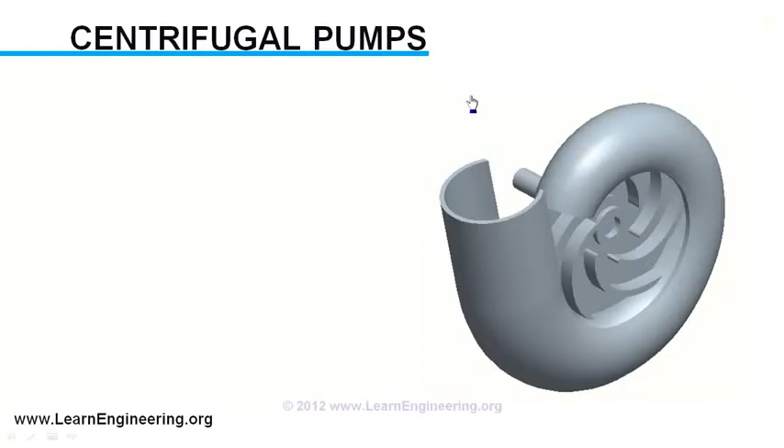Centrifugal pumps are the most commonly used turbo machinery devices, which are used to raise pressure or induce flow in a control volume. They are radial flow devices. Various kinds of centrifugal pumps are available in the market, with different construction details, but the working principle behind all of them remains the same. In this video we will analyze the working principle of a centrifugal pump with single suction, semi-open impeller. One of such pumps is shown in the figure, with one part of its casing removed for ease of understanding.

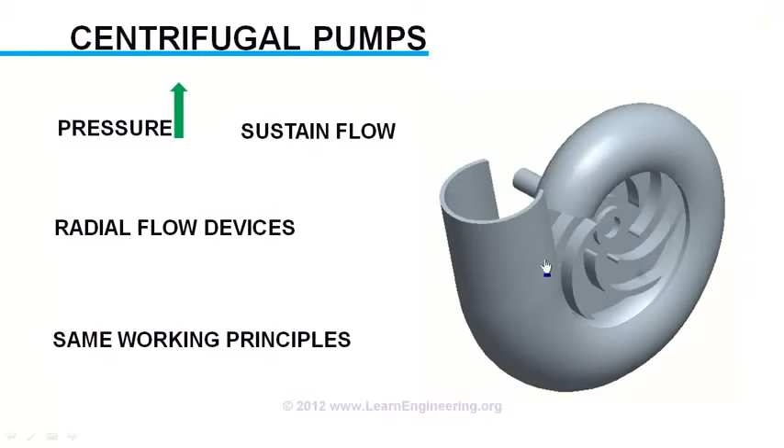Working of a centrifugal pump is simple. As the impeller rotates, it sucks fluid from outside through the eye of the impeller. The fluid is pushed radially along the impeller to the casing. The casing collects the fluid, and it is pumped out through the discharge nozzle. We will go through the main components of a centrifugal pump in a detailed way.

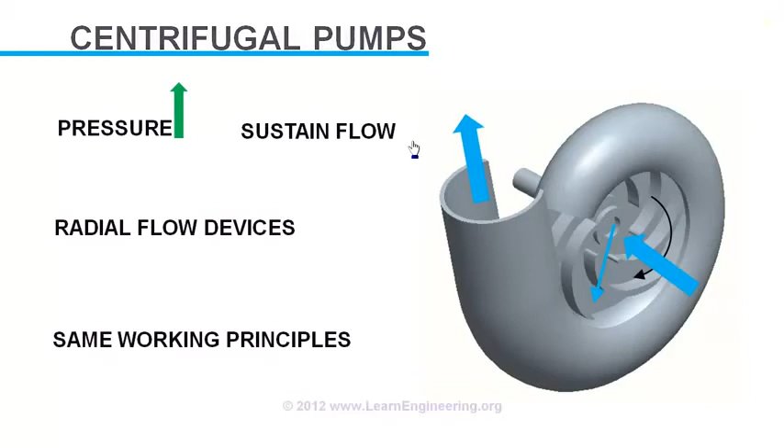First, the impeller. The impeller is the device which rotates and transfers energy to the fluid. It has a collection of vanes fitted to a hub plate.

The next component is the casing, which collects fluid from the impeller in an efficient way. The casing has a special shape, with area of cross-section increasing from inlet to outlet. As the impeller ejects fluid throughout the casing, along the length of the casing the mass flow rate increases. But increasing area of the casing helps in maintaining almost the same velocity. Thus the volute-shaped casing helps in converting the dynamic part of fluid energy to the static part.

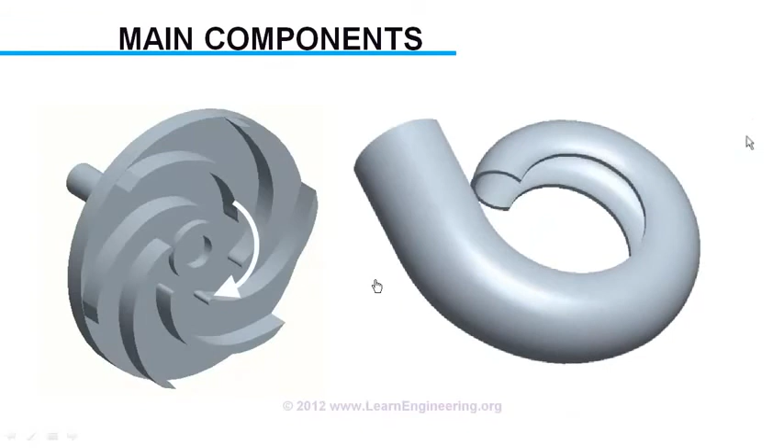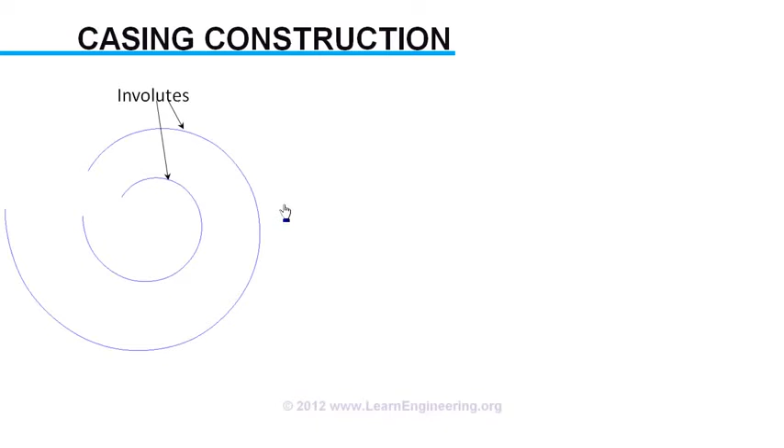It will be interesting to know about construction details of the volute casing. The casing is made of two involute curves, which are at an offset. A three-dimensional volute is made from these curves. A portion is removed from the volute shape, in order to accommodate the impeller in it. A discharge nozzle is fit at the exit portion of the casing. Most of the time the discharge nozzle is diverging in shape.

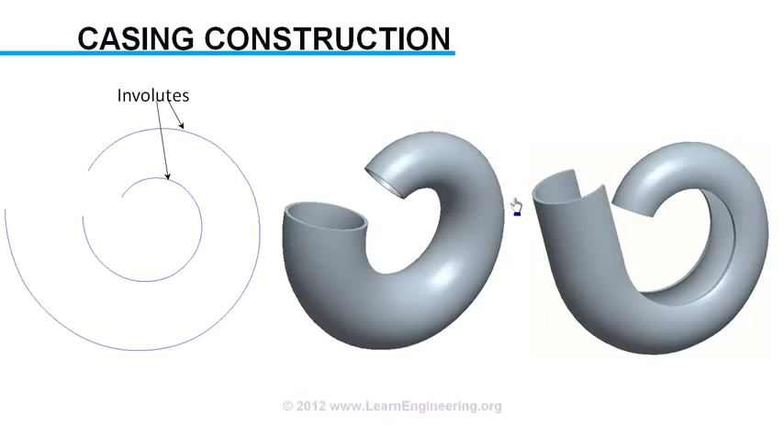For centrifugal pumps of small capacity, as we discussed, impeller and casing are the main components. But for larger centrifugal pumps, there will be additional diffuser blades also present, in order to reduce velocity further, or to aid in dynamic to static energy conversion.

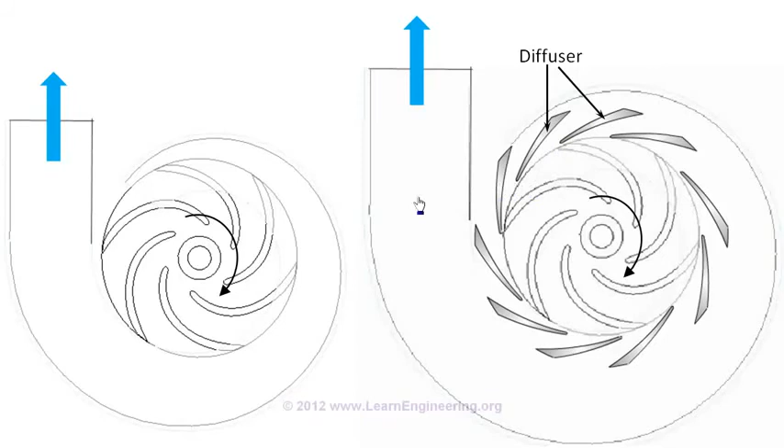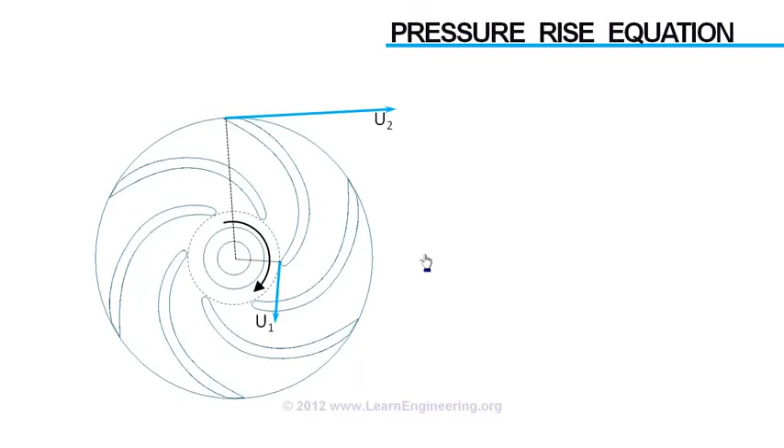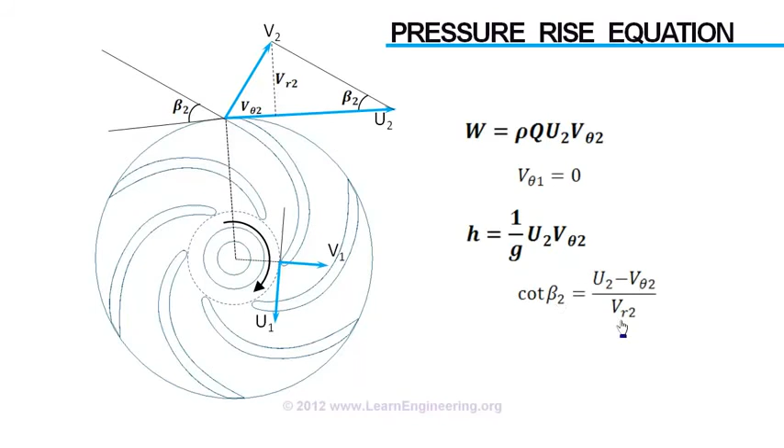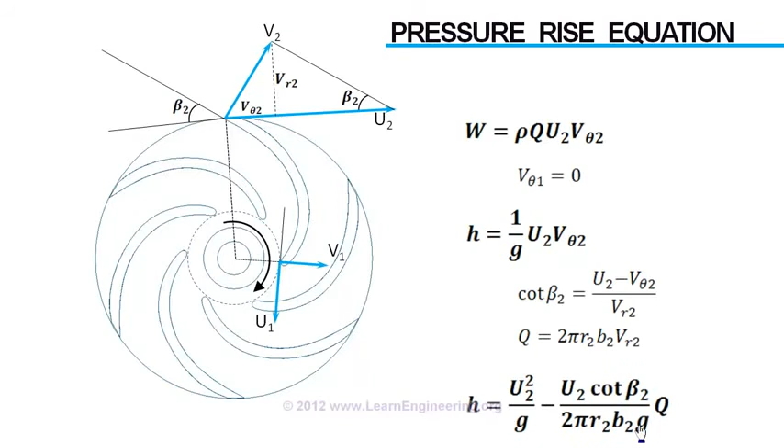Also, flow rate through the impeller is given as flow area times radial velocity. So head rise in a centrifugal pump can be derived in terms of flow rate. Using this we can predict what the head rise is, as we change the flow rate, for a particular pump geometry and a particular impeller angular velocity.

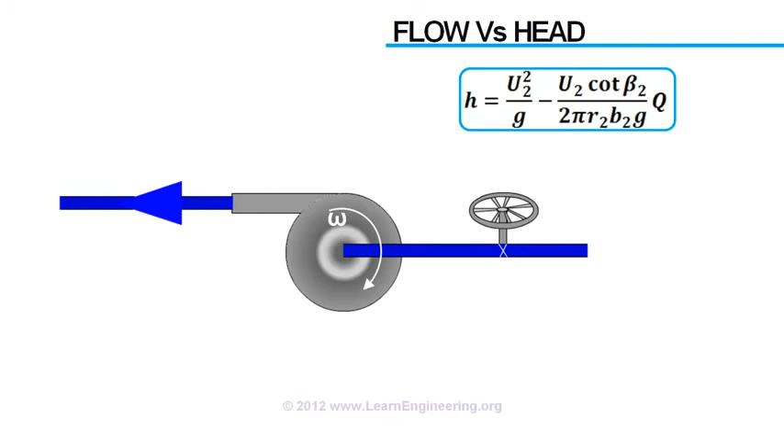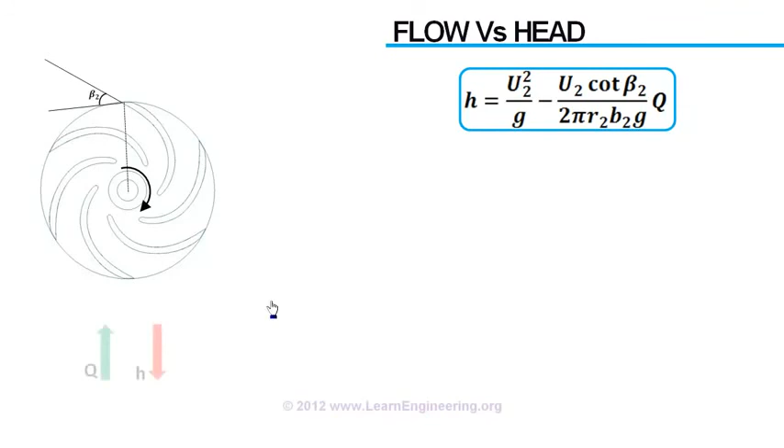The most important parameter in this equation is the blade outlet angle, beta. There can be three different pump characteristics depending upon the value of this angle. First case, if beta is less than 90 degrees. Since this term is positive in this case, pressure head decreases with increase in flow. These kinds of impellers are called backward curved.

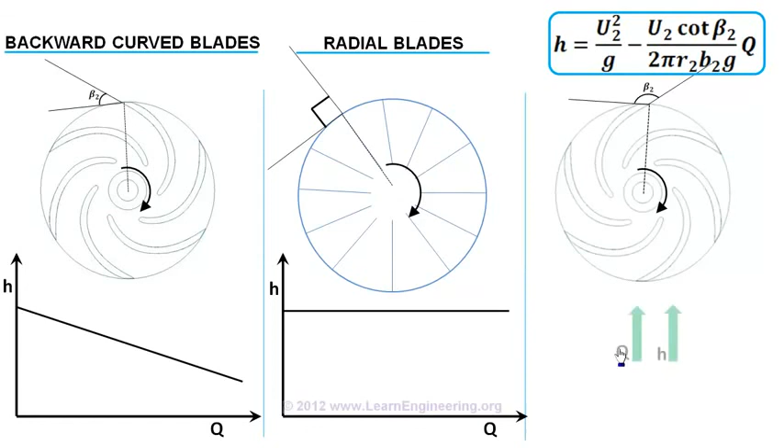If beta is 90 degrees, with flow rate there is no change in pressure rise, because this term is 0 here. They are called radial type. If beta is more than 90 degrees, pressure increases with increase in flow rate. Such blades are called forward curved blades.

The big question: out of these, which one is the most suited for industrial use? To get the answer for this question, let's see how power consumption varies with discharge, for each of these cases.

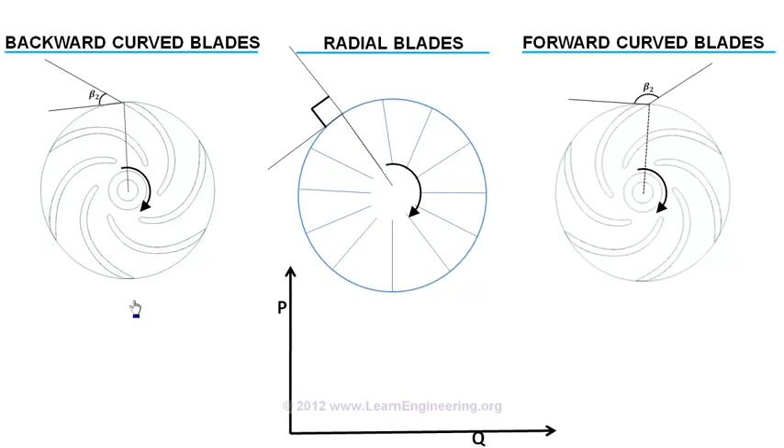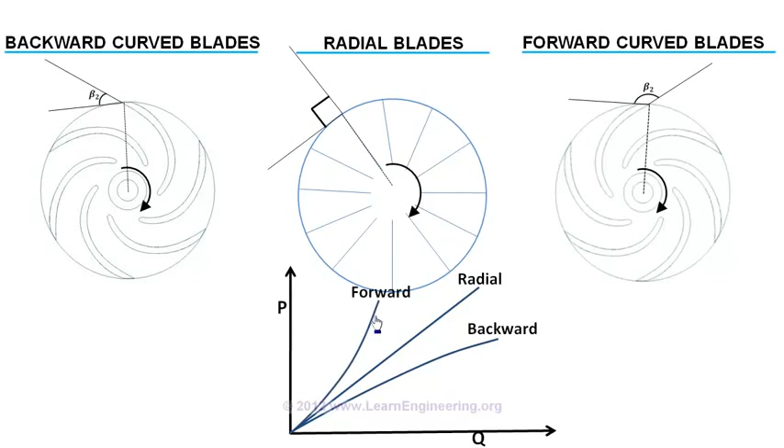For backward curved blades, as pressure head decreases with discharge, power consumption stabilizes with flow. In radial blades, since pressure does not have any connection with flow rate, power consumption increases linearly. In forward curved blades, since pressure head increases with flow, power consumption increases exponentially, making the operation unstable. This will lead to burnout of the motor. So backward curved blades, which have self-stabilizing characteristics in power consumption, are the most preferred one in industry.